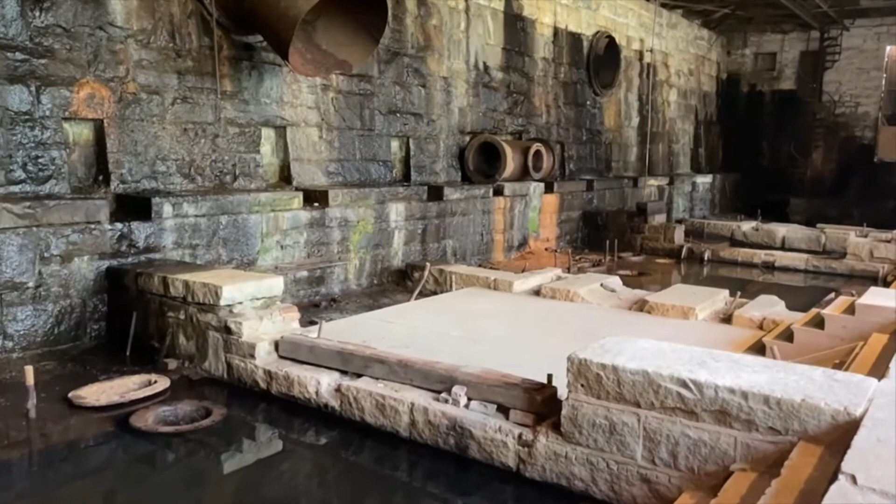In 1924, the water was directed away from the reservoir used by the pump house to the newly constructed hydroelectric pumping station and the Worthington Steam Pump Building. The pumping machinery was then removed and sold to the Japanese as scrap, who were preparing for World War II.

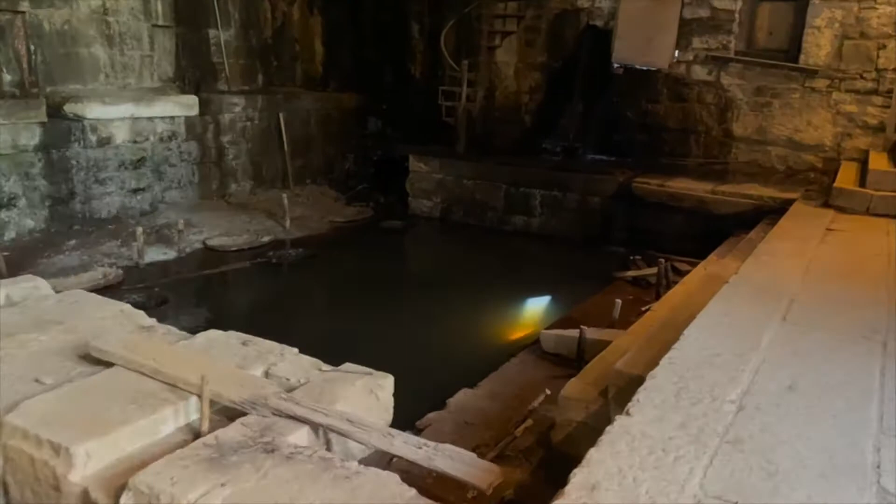This footprint was used to piece back together the pumping machinery along with the single existing photograph to construct a 3D model. It is important to note that while only one system was modeled, the arrangement was triplicate, so 3 pumping systems were originally built in the pump house. The historical model, created based on the digital literature, photograph, and drawings, simulates the motion of the pumps. Its operation will be explained in the following videos.

The Byrd Park Pump House pumping machinery featured Cornish valves. The Cornish valve was invented in 1820 by William Murdoch. These valves are commonly featured in steam engines during the 1800s and are now obsolete. The pump plungers and pump chambers of the Byrd Park Pump House received and discharged water through double-beat Cornish valves.

A double-beat valve, or equilibrium valve, allowed the Cornish valve to be opened against a high pressure using a minimal force. Air vessels were featured over each of the discharge sections of the suction chambers. The spring of the Cornish valve engaged the valve backing and pushed it to or from the valve seat and allowed water to flow through the suction chambers.

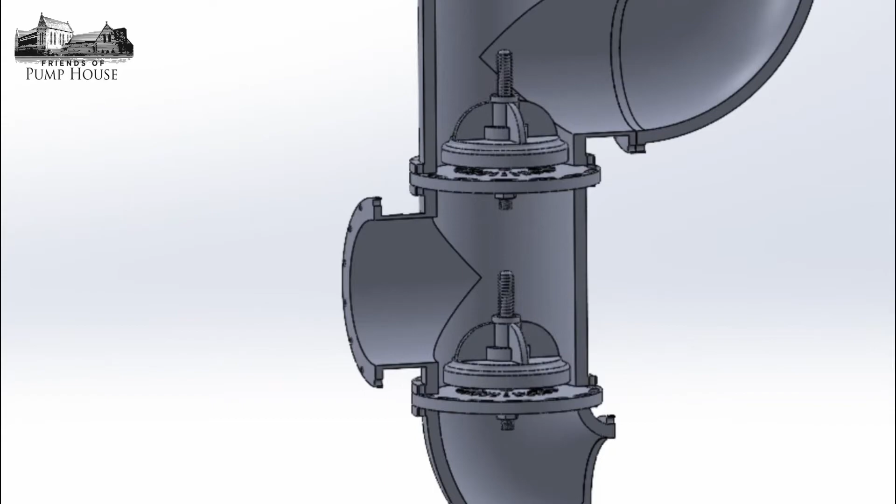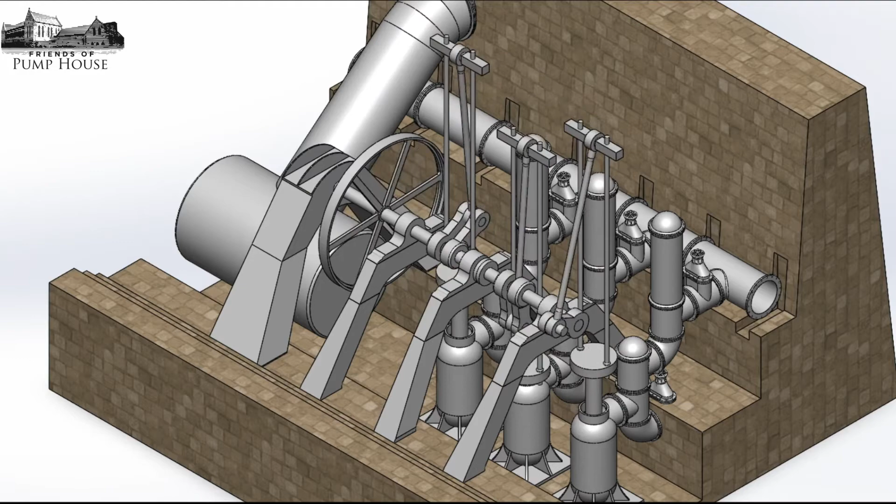The Byrd Park Pump House pumping machinery utilized 3 vertical single-acting plunger pumps per system. The plunger pumps were connected to rods that created an up and down motion as the crankshaft rotated. The pump plungers were 14 inches in diameter, and the pump chambers were 36 inches in diameter. The pumps received water from one common suction pipe and discharged water through a common discharge pipe.

The Byrd Park Pump House used water-driven pumps to deliver approximately 12 million gallons of water per day. The pump receives water through one common suction pipe. The pump plunger extends into the pump chamber and moves water through the suction chamber to the discharge pipes.

In the suction chambers, the water is controlled by double-beat Cornish valves that act as equilibrium valves to balance pressure. Other valves that drove water through the pump system were gate valves. These were controlled by an operator turning a wheel that guided the water flow.

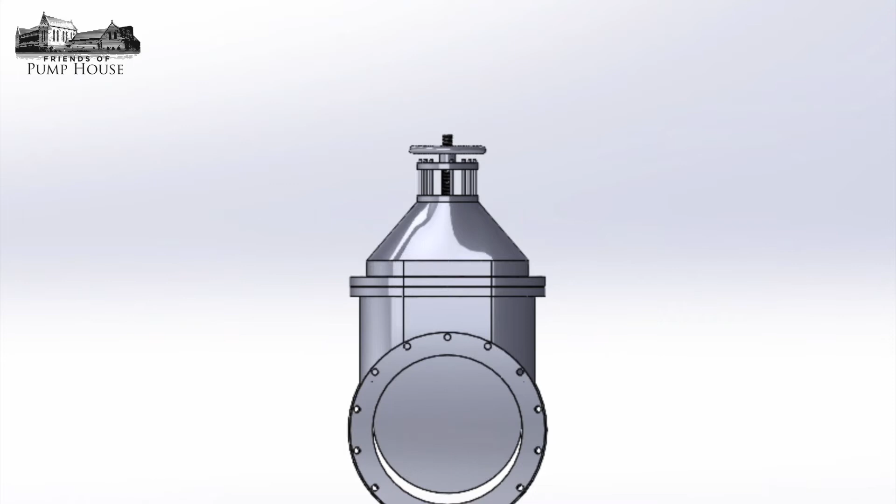The Byrd Park Pump House machinery featured rising stem gate valves. These valves are commonly used in water supply systems and are put in line with the pipes to be able to isolate parts of the system while also minimizing loss of flow rate when open. Gate valves are made up of the body, bonnet, and stuffing box, which are in line with the pipes and feature a handwheel, stem, and disc which controls flow.

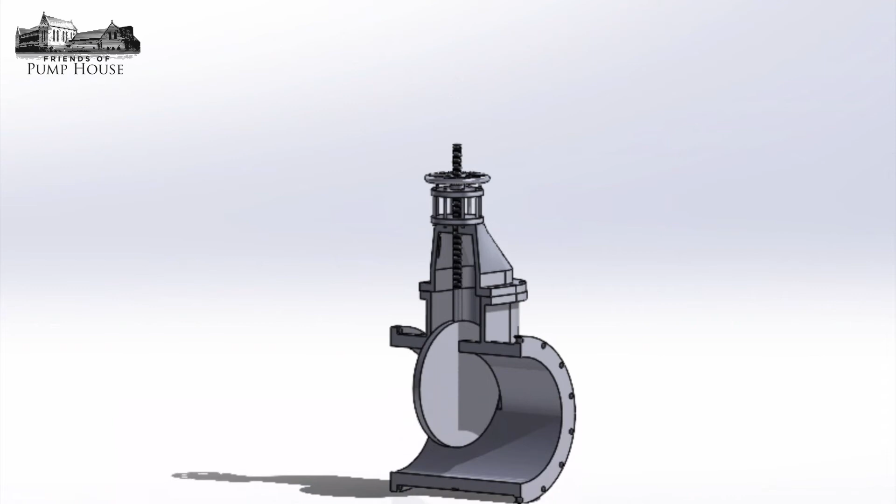These valves were located before and after the pump chambers and could be opened or closed by turning the handwheel if maintenance needed to be conducted. When valves become closed, the stem retreats into the bonnet and flow is not allowed through the valve. When opened, the stem becomes visible out of the top of the handwheel and stuffing box and indicates water is flowing.

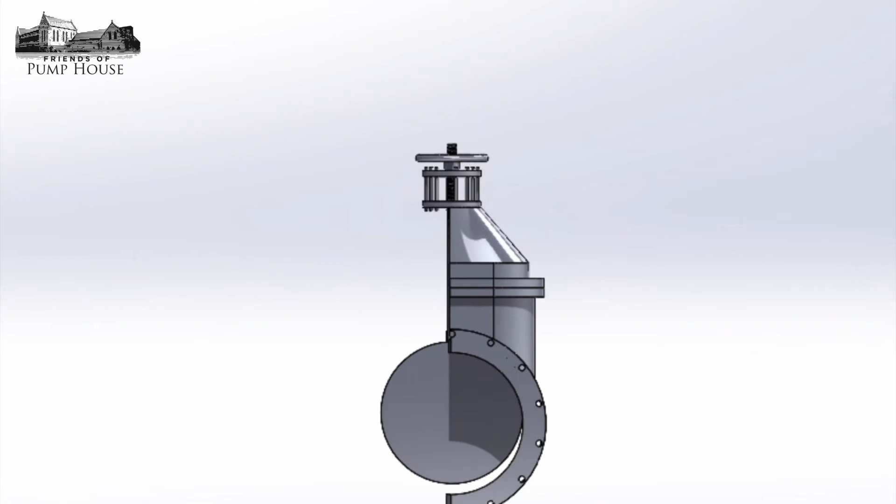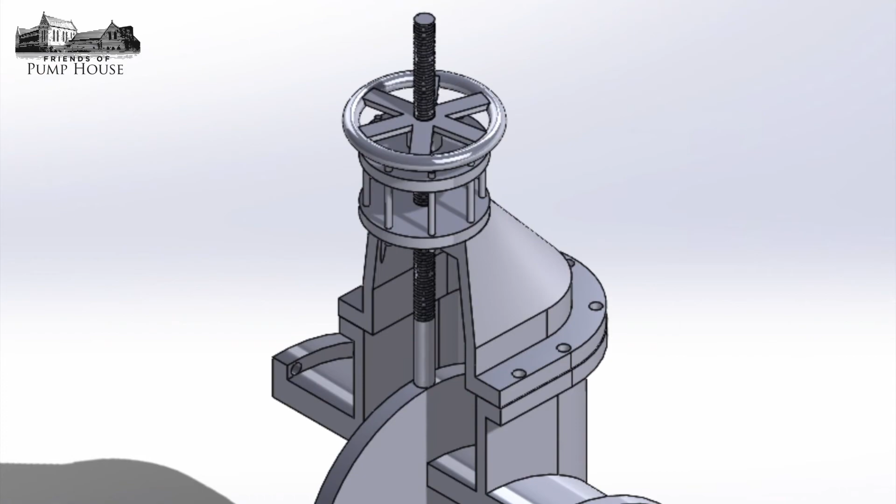Some downsides to the application include throttling, which is not its intended use because of the circular disc section not being an accurate measure of allowed flow. Throttling also creates turbulence, which causes premature wear on seals, so they should only be fully opened or closed. The rising stem can also accumulate dust and dirt and wear seals within the bonnet as it is opened and closed. These are still widely used today for their simplicity and ability to recognize if they are open or closed due to the rising stem being visible.

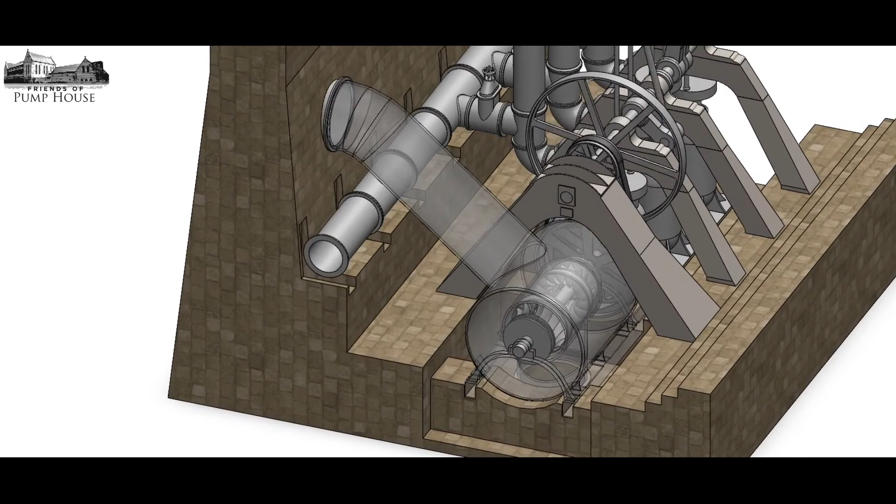While being the driving force of the entire pump system, the Leffel turbine also made the Byrd Park pumps novel and unique. Research revealed that the James Leffel Company began operations at Springfield, Ohio in 1862. They emerged into the turbine market with their double wheel design, which combined two Francis wheel styles into one unit.

This design, coupled with the recent invention of the wicket gate, resulted in a system with an efficiency of up to 93% and a specific speed of up to 102. For context, competing wheels were running around 80% efficiency and specific speed around 40 at best, with specific speed being a unitless value of turbine performance.

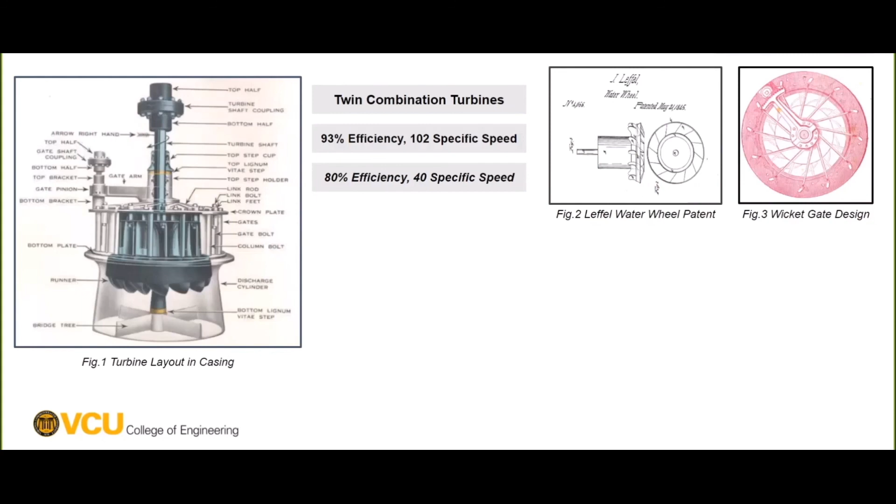Based on illustrations discovered in a catalog published by the company in 1894, coupled with the single photograph of the Byrd Park pump, the team was able to determine the exact style sold, the turbines used, the type of discharge, and the drive assembly used in the original design.